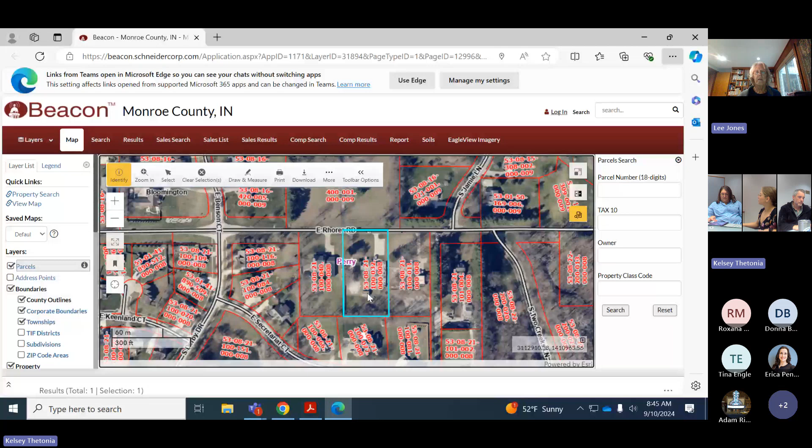As far as drainage goes, my main concern is that we don't have a great place to outlet it at the corner of the property here. We have single family residential all around it, and the nearest drainage easement is in this area here. The subdivision to the south does not have a drainage easement on the property for this to discharge to. So that was my main difficulty with this, but everything else is really straightforward.

Just one property over there seems to be some sort of easement as well. Is that a utility easement? Yeah. So that might be, you see what I'm looking at? Maybe an actual easement to get back to the lot behind. That's what I think. Okay. I didn't see an easement there. Yeah, there are not any drainage easements anywhere on any of those properties.

So historically, this was built as a home. It was used as a daycare facility for quite a while. In fact, it still has all the playgrounds and stuff from that. My understanding is it either sat vacant or was used as a home for just a few years, which triggered planning to say they had to re-get their conditional use and bring everything up to the current standards. My clients had anticipated, we're buying a daycare facility, we can go in a daycare facility. We're trying to bring everything up to snuff.

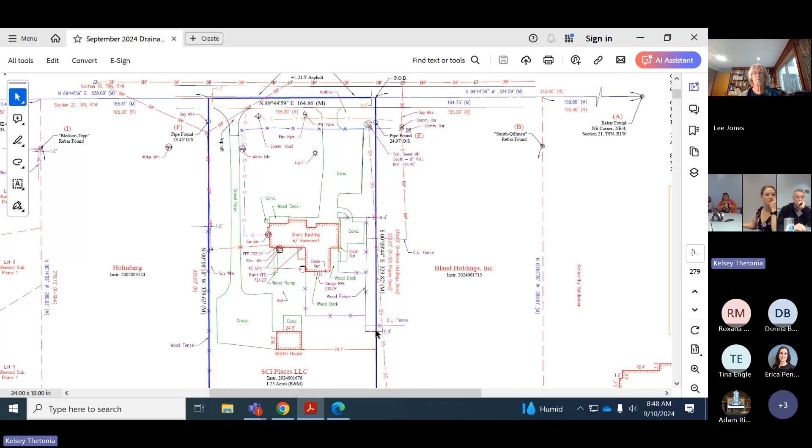The lot is 1.25 acres. And so getting detention in there while still allowing for their very elaborate playground setup was extremely difficult. Currently the parking lot drains to the east property line. Unfortunately, there is a sewer line along that never received an easement. So CBU is holding us up, in that they're requiring an easement before they'll release anything. And therefore, we can't take any of our drainage along that east property line. That's how it currently drains. And so we are having to route around the west side of the building. So that's the summary of what's going on there.

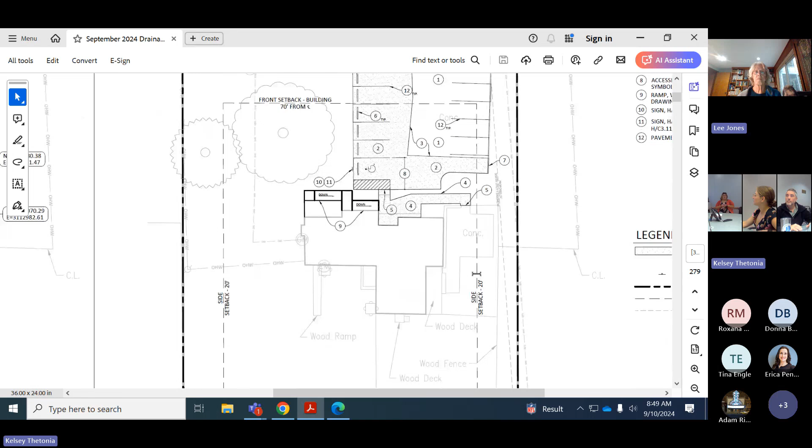Thank you, Kelsey. Because of how the county views gravel, and it is a very old gravel lot, we are actually reducing our pavement surface because the concrete we're putting in is less square footage than the gravel we're taking out. There's existing 2 separate parking lots and 2 separate drives. We're not allowed to keep the 2 drives, and so we're consolidating that up front.

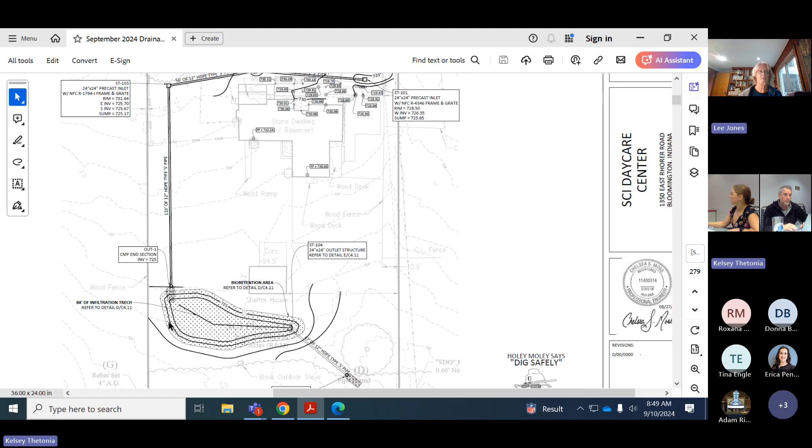Okay, so you're routing your drainage around the building, the west side, and then to a small pond on the south side of the property. Yeah, and that is only at its absolute deepest about 2 feet deep. That's for safety reasons, because we're gonna have lots of kids. I really can't take it any deeper.

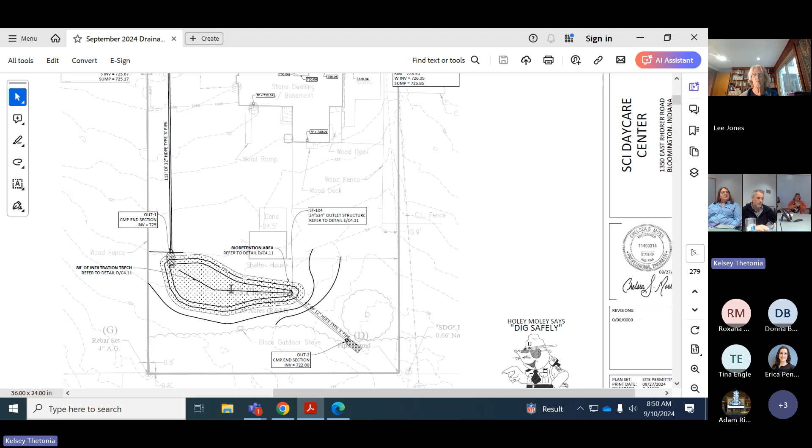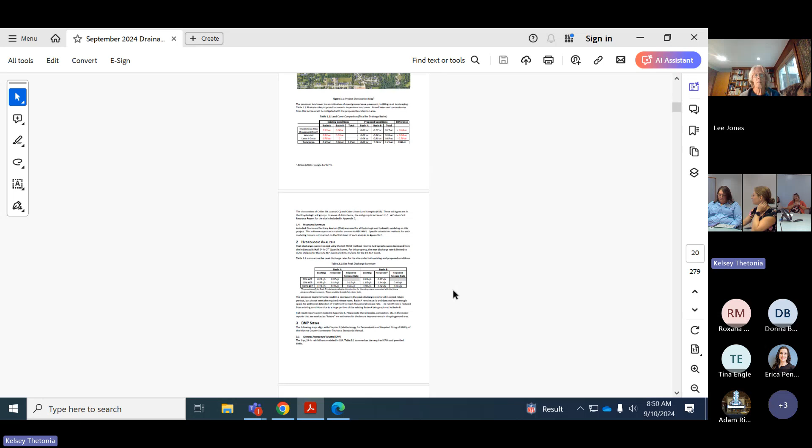And to take it deeper, we would have to build a berm, which is just gonna cause even more safety concerns. So fairly limited. I think a little further in the packet, as part of the drainage report, is the playground schematic, if you wanna get an idea of what they're looking at. They're in schematic phase drawing on that with another consultant. Oh, there, okay.

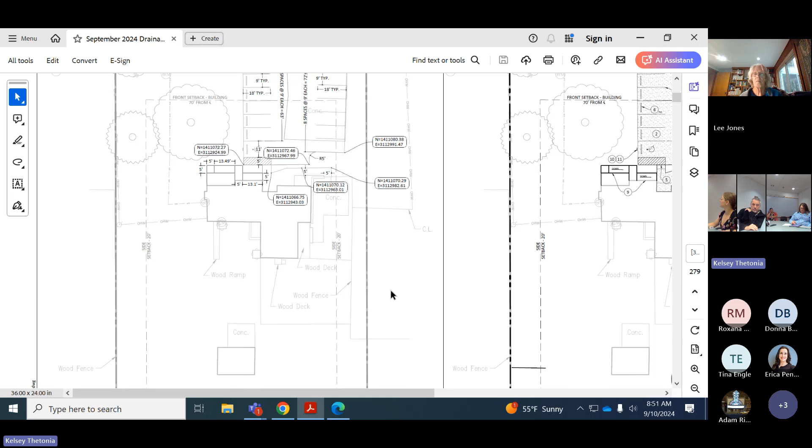So that's gonna tweak a little bit, but essentially our pond will be between those 2 paths on the back part. Those will get reworked to accommodate the drainage. Do board members have questions? So the pipe leading away from there, I'm assuming it's all draining the way it did before? Yes, there's a little bit that was draining towards the east. That'll be going towards the west, but we maintained the runoff peak discharges between pre and post.

We were not able to meet the critical watershed standards, but we are not releasing any higher rates than currently are. Is the board agreeable to waiving the critical watershed rates and allowing them to proceed with the design? Yeah, I mean, it seems like it's a very small drainage area effectively, so.

One of the things I noticed in going through the new drainage standard is it makes a lot of sense for larger sites. But when you have something this small, 1.25 acres, in order to put in enough storage to have fully met those, it would have taken out half the playground area. Just as something to consider moving forward with the new standard. We've come across that before as well. The small sites always cause issues.

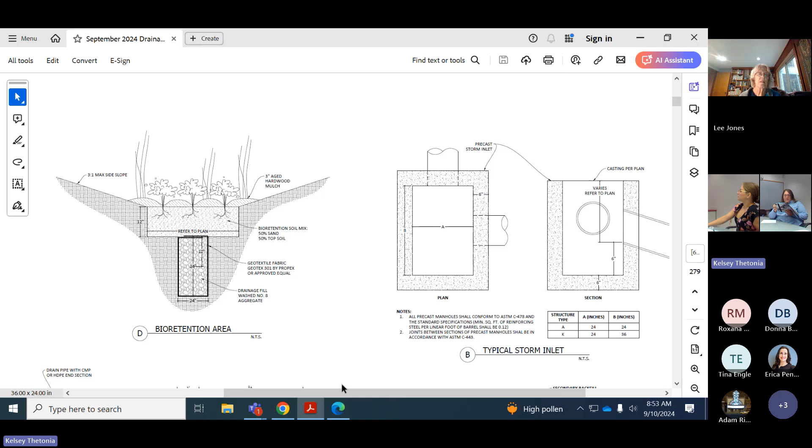So for this, I don't want to stop a daycare project by any means. I feel like they've done quite a bit for drainage already with the impervious surface they've added, so I think it'll be a good improvement. And is there any way, I saw there was a schematic on the drawing of the pond, to put some storage underneath there in the gravel fill or anything like that? Oh, there is some there already. Okay.

That's our treatment. I tried my best to expand that as much as possible with it still being functional, because of where this needed to occur and where we need an outlet. It does not have an under drain in it, but the soil survey is showing fairly percolating soils in that area, so I felt comfortable with not having an under drain. I expanded that as much as I felt we could without just having a huge gravel pit in there. It's not typically what we see, but yeah, I see the infiltration trench. I assumed that was underground, but I didn't look closely enough.

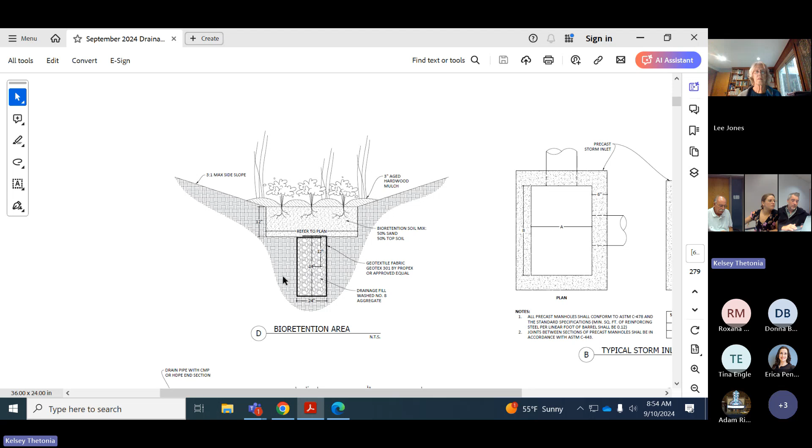Does it run around the perimeter? Through the center. I guess, are there any known cases of water pooling up or anything like that? There's no evidence on site of water pooling in that area. What about during rain events? Have you been there? Been there pretty shortly after, and nothing was overly soggy or seemed to be holding excess water.

And their playground, that would be one area that would get soggy. So the new playground will have an under drain system for the rubberized material they're putting in. And I think they're using more of a bark mulch material in their non-paved areas; they have about 3 or 4 different surfacing types. Anything that is impervious is getting an under drain, and with that design, we will have additional bioretention areas put in just for all of the new playgrounds. So there will be even more bioretention once they do that part.

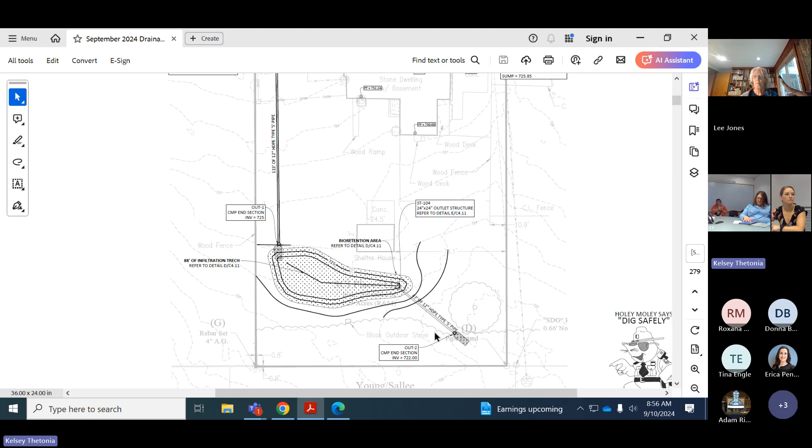This was focused on getting them in, because they've got to get in there and get some cash flow going before they can go back and do the playground, and that'll probably be phased. But I've already been in conversations, and I'll be working with them to size those bioretention areas as we work through the phases on the playgrounds. So that would come through as a site plan amendment? It'll either be a site plan amendment or a separate site plan, depending on when that phasing happens and how planning wants to handle it timeline wise. Regardless, any changes are gonna come across my desk, and I can bring it back to the drainage board if needed.

So Chelsea, they have a playground there now, right? Is it soggy, or do they have any issues when it rains? I've not seen any issues, so the soil is perking. Okay.

And then, you know how we're not supposed to have an orifice smaller than 4 inch? So I'm just curious how the drainage calculations would have panned out if we had to do it to the restricted flow rates and then have to bump up to a 4 inch, and then where we are. Right. That's more out of curiosity. It might be a wash.

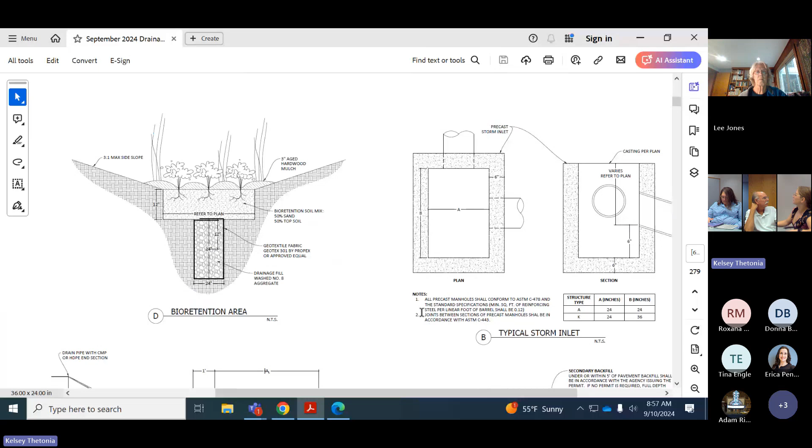Yeah, on that outlet pipe, Chelsea, do you have any type of orifice plate, or is it just a 12-inch opening? I apologize. Was that on a detail sheet? Maybe Chelsea had them. I don't think I had any work displayed on that. I will confirm. Yeah, I mean, it may be the same issue, having that smaller orifice. And I'd be concerned having that with no underdrain. Yeah.

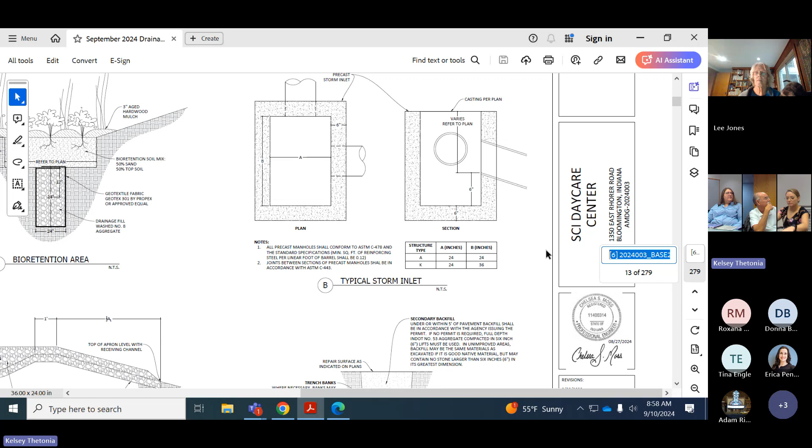Oh, and my concern is if there is outfall from the overdrain, how it's gonna affect neighboring properties. That's probably my only concern. The last thing I wanna do is cause a significant area in an adjacent property that then has standing water that never did before or something like that. I already envision the calls. Yes. Well, but did it flow that direction before? Look at Deckard's survey and just see. Yeah, I was wondering if you could put topography in there. Oh, it didn't have it, okay. We'll do that on his plot plans.

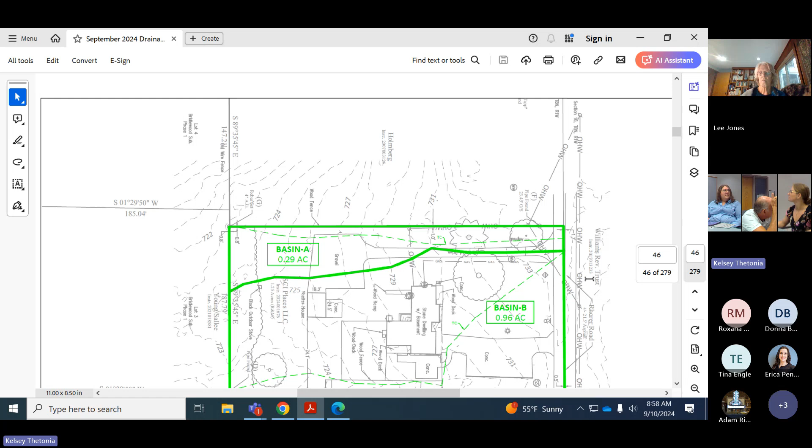You can see the change in the drainage basins, David, on your drainage report. Your grading shows? So it's 46. 46? Yeah, I think so. Okay. Is this the one you were thinking? Yes. So we reduced basin A, which went to the west, by a bit, just because we had to route around, because of the placement of that. So that went southwest? Yes. Okay, so the southeast basin then gets a little larger. But we were talking 0.2 acres.

And it flows southeast, right? Yes, so we have an additional 0.2 acres going southeast. Is it toward the house or toward that? It basically flows to the corners on both sides. Everything drains to the property corners, which in turn drains kind of across that southeast block. I'm just curious where it goes. Where are the contours? There, okay, got it, sorry. So we're going down, and it just goes through the rear yards.

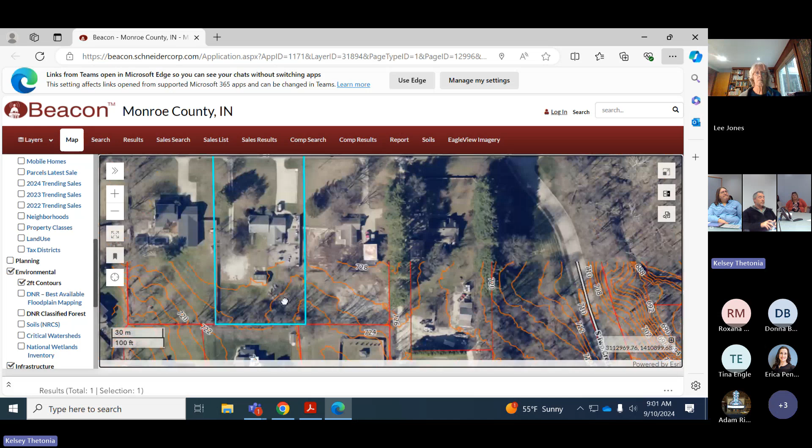Yeah, this is what I first saw when I was really concerned about this, because this property owner here is going to get the drainage from the pond. They have a fence, there's no easement. So I don't have a current solution to get this drainage across these properties. Has there been any thought or discussion with the adjoining neighbor to maybe get an easement to just drain it out, or were you just coming to see about the variance today? Yeah, because that's a driveway, that's not easy. We've not had any discussions on that. I could see why. So that has not been something we've discussed.

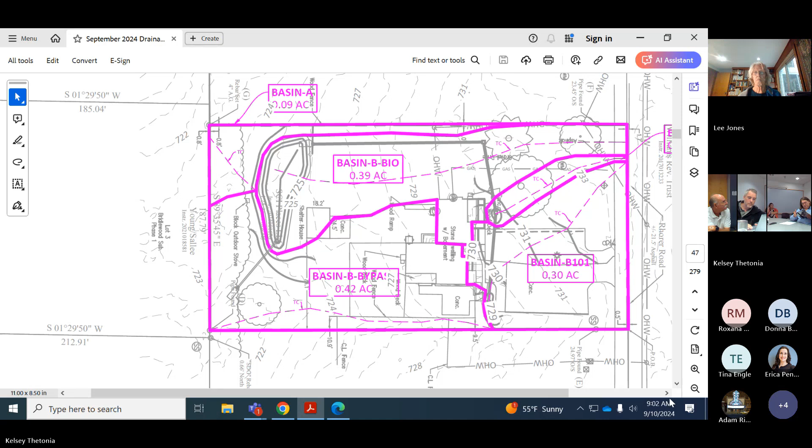Just to go back to the way these were put together: you have an inlet grate and an outlet pipe, so we're doing forced infiltration. There is no underdrain on those bioretention facilities, so the overflow, the top orifice, is regulating that outflow, to maximize that infiltration in an attempt to minimize our volume output. And in the drainage report you will see that I've included a pre-design for the schematic playground, speaking with Kelsey, so that we had an idea of where storage would fall and the requirements on those. That's all included in the drainage report at this point.

And right now, she has a couple of very small rain garden type areas shown on there. I'm anticipating that one that you're circling to actually be where most of this goes from the playground improvements, and that it will be bigger than what is shown. Yeah.

So, what was, we matched, you matched events or? I matched events, yes. Okay. We've matched events despite the fact that we've moved a greater area, slightly greater area to that basin A. So how much? And that does include matched events with the change in runoff coefficients in accordance with the new, and with that increased area, so.

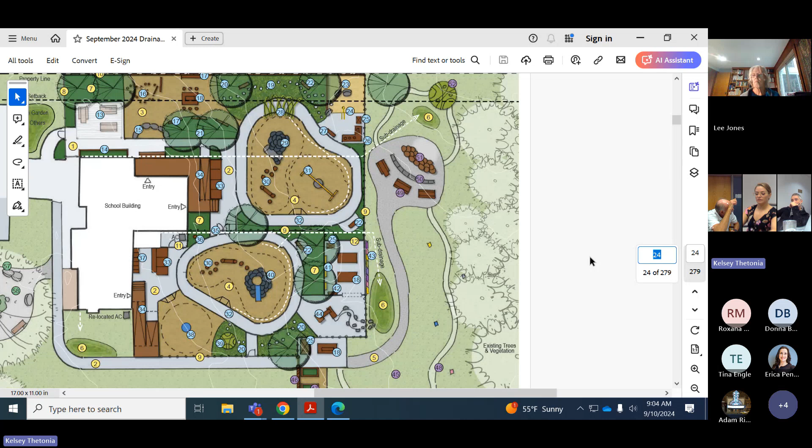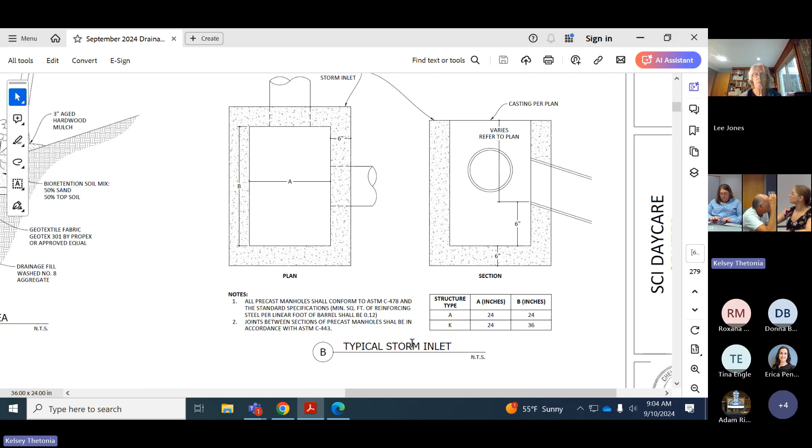You said you had forced infiltration, so look at that. Can we look at the outlet control structure? I don't know how to tell. Yeah, there was one that had that. To the right, I think. Go up, I think it's in the outlet. To the right. Is that your outlet control structure? Yes, or no, that's typical inlet. Okay. There it is. Yeah, I think I had that one in, it should not be on there. I apologize for that. There's not in orifice.

Okay, and, it's just gonna have a grate. Sorry, it's been a few. It's all right. Been a minute since I looked at this. So I'm confirming in my report that that is not there. Cause I mean, we had one other project where we didn't try it out not having an orifice for that.

But I'm sorry, that's the one 6-inch orifice, so there's forced infiltration in the infiltration trench and in the soil, because there's not an underdrain, and then we have one 6-inch orifice. And then we have orifice control in the top overflow for the 100-year. And with all of that included, we match storms in that basin as it sits. The 24-inch was the deepest I wanted to go for safety, as well as with the bioretention aspect. It's really pushing it on plants, but you can get that to drain. Mhm. Survive.

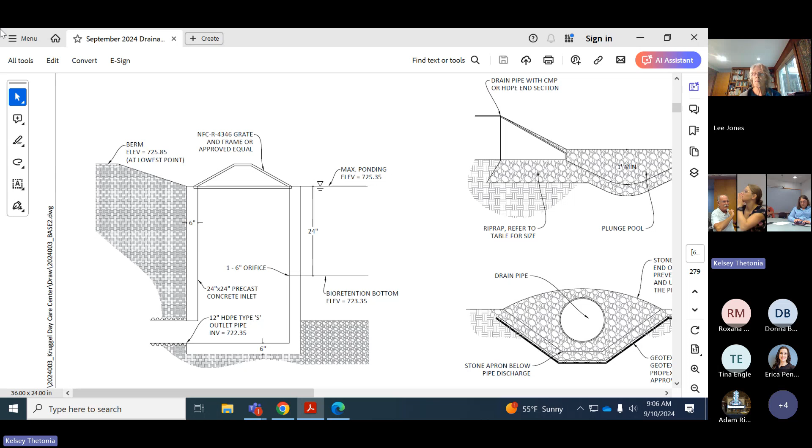Any suggestions? Did you have a drawing that showed the basin compared to the playground, just to see if the basin could maybe be? Sounded like the basin couldn't be made any bigger. I don't have it overlaid, because I don't have CAD, but I can show you. I'm just gonna walk up here and show you where that goes. So there is a walkway that goes to some raised garden beds that they're looking to do. That walkway is gonna cross right about here. The playground will go all the way to the end of this existing shelter house, so it will come straight across about where that 47.1 shows up. And then we will run their path along here.

This tree is staying and they want to have some gathering area around the tree for group time. Where's the group time? Around this tree down here, not necessarily amphitheater, but I'm envisioning some stump type stools for small group time with class. Could the basin be enlarged toward the southwest then? We could enlarge it a little bit towards the southwest. I was pulling back from that because they're also planning on having a trail around that way. And the further I pull that, the steeper we're going to be dealing with more of a path. So that was my thought process there.

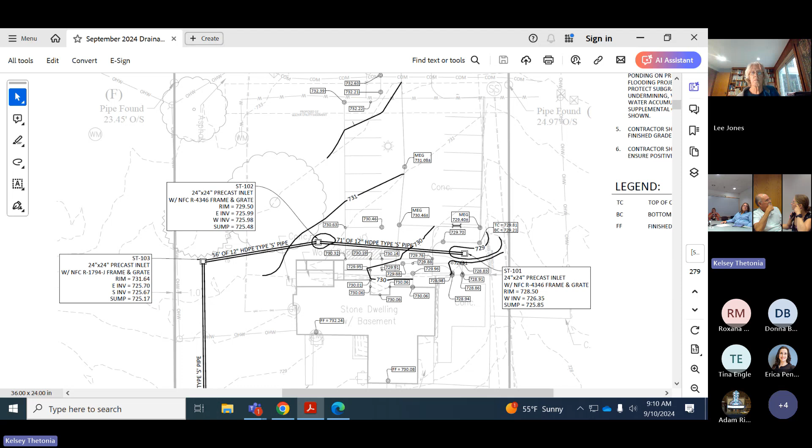So, I'll be honest, when I was originally talking to Kelsey about this, we were going to do some small rain gardens for the treatment up around the parking itself. And then we ran into the easement issue, and yeah, I still would have preferred to do some small treatment up there. Because like I said, if you're taking the gravel as an impervious surface parking lot, we're not really changing the impervious area in the space. And as such, if we could treat that with a small rain garden for quality up front, I think that would be less impactful to the neighbors.

This, in my opinion, is gonna be more scary to the neighbors than treating up front, because we're having to release in the back and we're having to release further down. If we could treat with a few small rain gardens purely from a quality standpoint, because essentially right now, what we are treating in matching storms is the change in the runoff coefficient. Because we're not increasing the impervious overall. And so we're holding that change to match events, and then we're treating quality.

And from an overall picture standpoint on this, yes, there's the standpoint that we've had to add a whole bunch of infrastructure and there's some cost increase, but I also feel like if I lived next to this, it looks a whole lot more imposing and looks like it could cause a drainage issue, as opposed to rain gardens that would release about where that structure 103 is, and release down on the property and run across the whole property, as opposed to having a concentrated release at the back end.

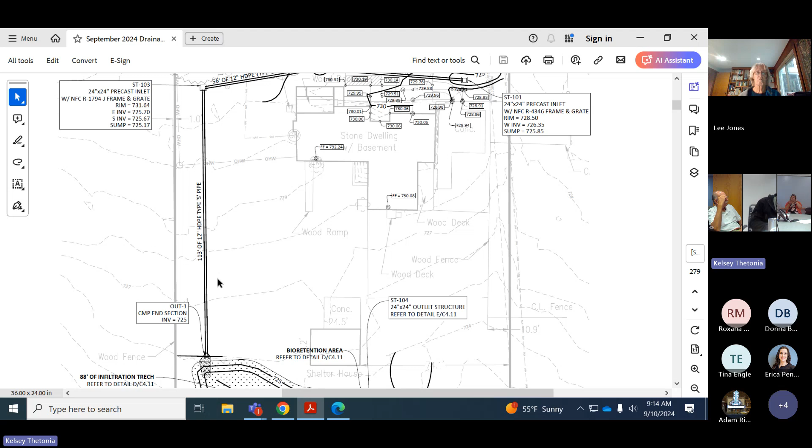So, what about increasing storage by, instead of piping, turning that into kind of a bioswale or something like that? Wouldn't that assist with the treatment? We could swale some of that, yes. It would increase the time of concentration still. We would still have a significant amount of detention. Because I had to get it all the way back there, I was trying to weigh against what they're looking to do and having those playscapes, and weigh that against where I had to put infrastructure. So I'm running it in such a way that they can put raised gardens on both sides and things like that. But that is a possibility.

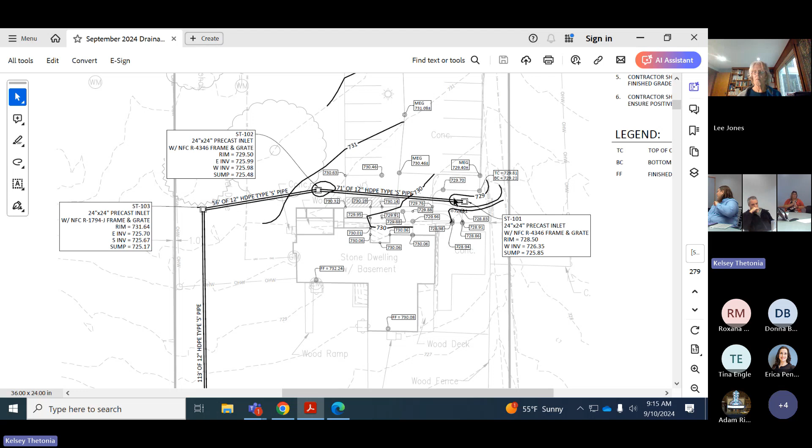As I say, they could just turn the raised gardens. Since the raised gardens are there, they just turn it 90 degrees, seems like it would be. Yeah, I'll be honest, the location of those raised gardens is outside of my expertise too. I would have to talk to Carrie, because I know there are some aspects that her and I have had to go back and forth on, because they have specific educational concerns. Yeah, I was just trying to get some more availability for moving the water and treating along the way.

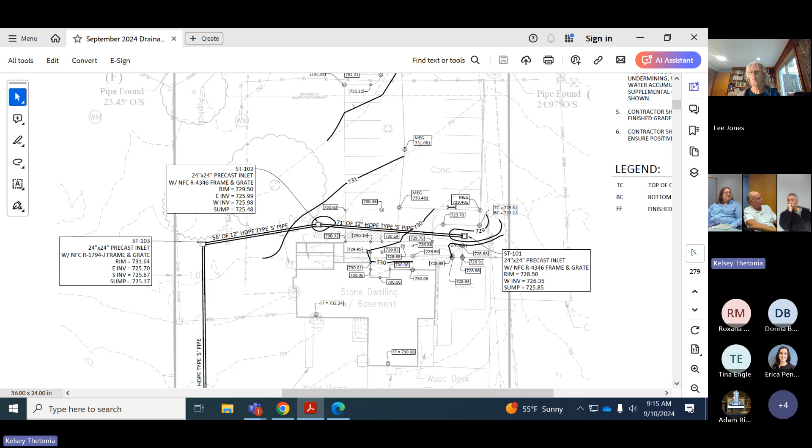So, I don't wanna make this difficult. Right. So a motion to approve the drainage plan meeting the previous standards, but with an evaluation of bioswale and/or increasing the size of the detention pond, in an effort to keep the flow to the southeast at pre-existing conditions.

And with the justification that this is a small site. Yeah. This does go to the planning commission, yeah. Or is this through the thing? No, this is all administrative, just the site plan review.

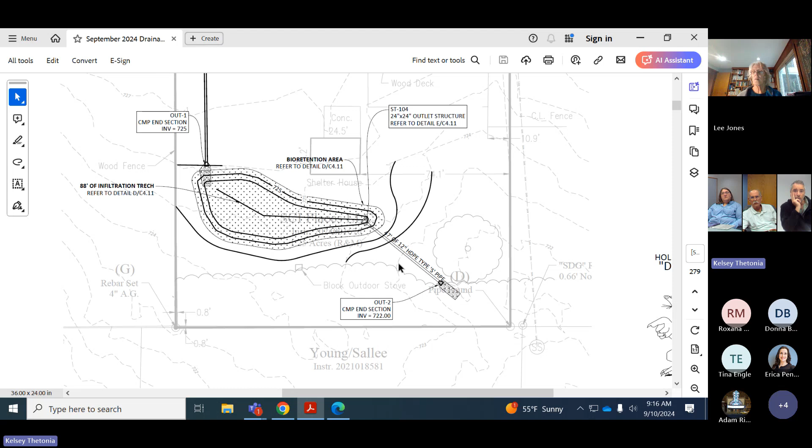I guess before there was a second, planning was on here, and since this is a petition, I was wondering if we'd let them see if there's any particular question they had for us prior to the planning permit, if they're on here. Drew, I saw, was on earlier. Hi, Drew, Sean, just in case they had any questions. And they might be waiting. Hi, Daniel Brown here. I'm the planner that's going to be handling this petition, and no questions so far. Okay, cool, thank you. Thanks for letting me make that pause.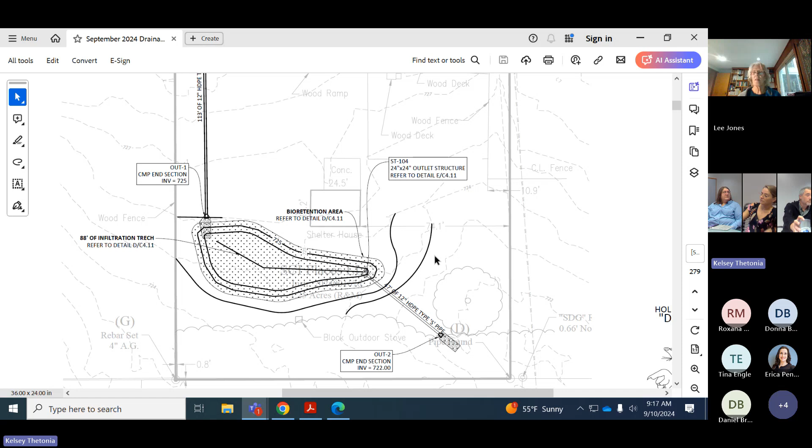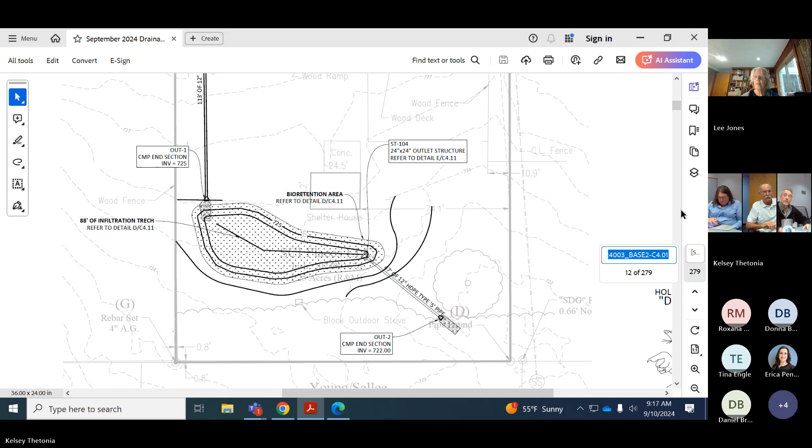Was that motion clear enough? Yeah, I'll second. Okay. We'll go a roll call again. Lee, yea or nay? Yes. Ginger? Yes. Bill? Yes. And audio, yes. Thank you. Okay.

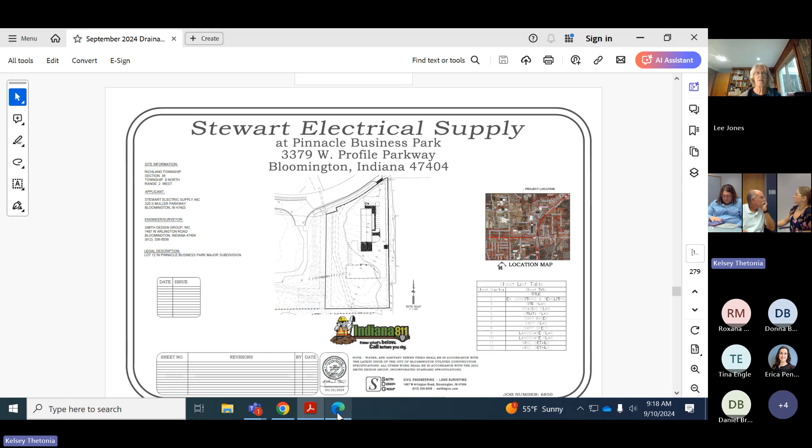Alright, next you have a development on one of the lots in the Pinnacle Business Park. So this is the business park where Profile Parkway goes through. This area drains to the regional pond on Jonathan Drive. And this has been the part where we have very interesting things like contaminated soils. We've seen some industrial uses come in here. We have McAllister's property. We'll have a U-Haul development right here. And then this one is for an electrical supply company. So they'll have a building, parking area, and that's all. So all of these projects require drainage board approval, so that's why you're seeing this, even though it is draining to the regional pond.

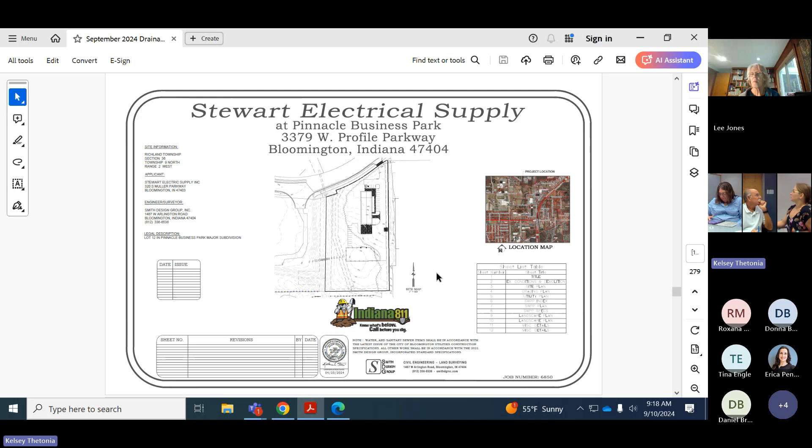Katie and Jonathan Smith Design here. Is there anything else you'd like to explain about this project? No, there's not a whole lot. We are here because of the conditional approval that was set for Pinnacle Business Park subdivision. This is, like Kelsey mentioned, Stewart Electric. They have been in Bloomington since the 80s. I have Sean Diltz here directly with Stewart Electric, so if there are any operational questions you guys might have. Fairly simple site plan. They've got their building that will house showroom, offices, and then the majority of it is going to be storage of the supplies that they provide.

Customers can park up towards the front, which would be the north, which is to the left side of this. Employees and contractors can come towards the back side. They have loading docks in the back, so contractors can back up, load their vehicles, go out that way. Larger trucks can unload. Most of the operations from that perspective will be on that south side. They also plan to have an outdoor storage area for materials that will be fenced in that location. As you guys are well aware, this is in Pinnacle Business Park that has the affected soils. There is a dashed line cutting diagonally through the parking lot, and everything to the south and west of that line is the affected soils.

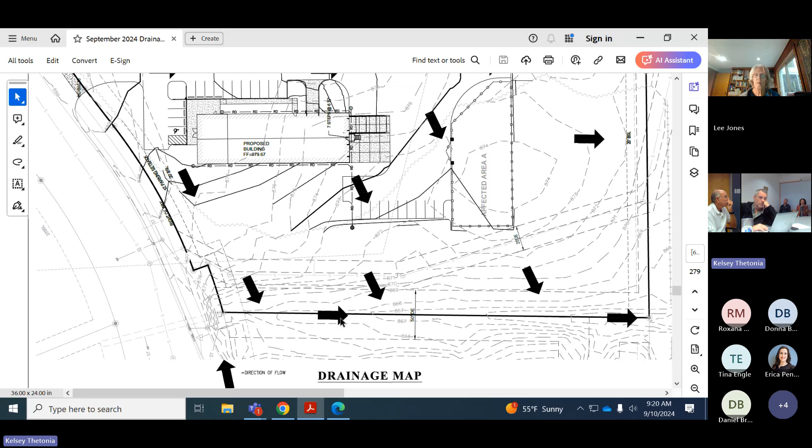So having done McAllister, we're trying to keep in mind different things that we need to look at with those affected soils and trying not to be invasive as much as possible. So the design reflects that. This is sheet flowing. We do not have any storm structures in here. So this will sheet flow across the parking lot, into the lawn area, into the swale that is designed to convey runoff from these sites. We're not even close to exceeding what the impervious surface allowed for this site is. I want to say 70-ish% is what we're allowed, and we're down towards the 50% range. So that's what I have on this, but happy to answer any questions you guys may have.

And so, is this the affected soils line here? We have a hatching on some of this, but it gets confused. Yes, that one that Kelsey has. This one? Yes, exactly. Nope, sorry, it's this one right here, the dash. Yes, on some of the other sheets it is hatched, but it gets messy to keep that hatch on. Right. The line's still there, but not all the hatching. Yeah.

So, there will be some excavation in the affected area. Do you have an environmental company available for overseeing any of that work? I don't know if they have been hired. It's been suggested that Terracon be involved with that, since they are obviously very, very familiar with this site. We had hired them, they've done the first phase and they are on board, so.

And I will say too, speaking with the developer on this site, the EPA is close, if not there, to being done with this site. It's a very, I'm probably not using the right words, clean site, and the remediation and everything has gone really well. I think they're pretty much done with this site, as long as we maintain the precautions around the affected soils. Yeah, the restrictions and things are not going away. Yep. Okay.

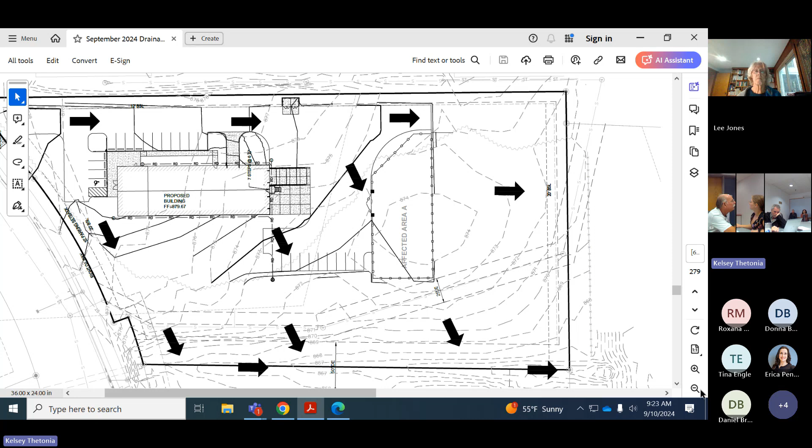So it looks like we're filling anyways, right? It's filling over the affected soils. Yes. You might have to strip some of the topsoil away, there's a 1 foot cap that's supposed to go all over that. But it will then be filled. Yeah, we were just trying not to penetrate into that at all if possible. We were kind of doing the same with our erosion control measures, not putting silt fence, but the coir logs and things like that.

But you'll still have a fence through. Yes, in the affected areas there will be the fence posts and things like that from a long-term perspective. So we've had that on some other sites. Do they have any issues with that? Because those typically go 3 foot. I think if there's an environmental company who can oversee that work, if they are excavating, when they auger, any soil that's removed for the fence post will need to be disposed of properly. Okay.

I appreciate not using up all the impervious allowable areas, so that's great. It helps with our detention. We normally don't get that, ensuring that we have enough capacity, so I appreciate that. Usually it's, how big can I make my building? Right. And this basin wasn't designed for the new standards. The regional pond. That's why I appreciate the reduction. It's probably gonna need it. Well, it's what the standard was at the time.

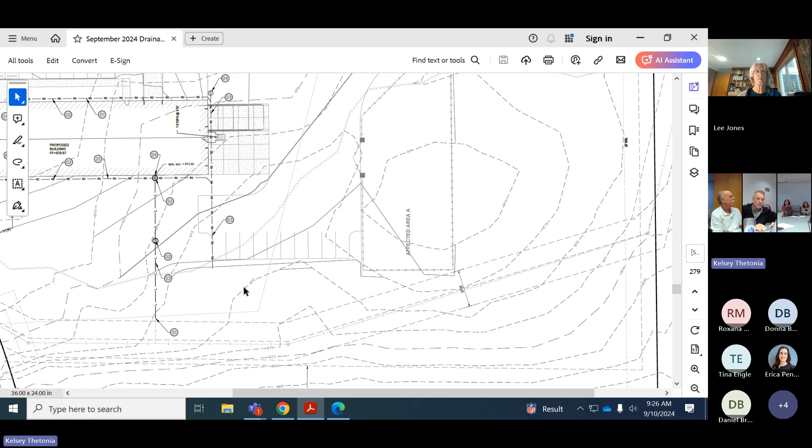And I do have proposed on the southern lot there a river mulch bed for the landscape area, because all that runoff from the parking lot will go that direction, even though it's about 2%, 3% slope in that parking lot. Not that the velocity is gonna be great, but at least let's put the gravel there, it'll catch it first before it goes on to the lawn area. So you put a river gravel edge on it. Yeah, it's shown on the landscape plan, maybe shown on the SWPPP as well. That makes sense. It's delineated. The next sheet down, there it is. Okay, that is helpful.

I understand the intention of having sheet flow, not having to encapsulate things, but we've had issues with erosion anytime you have a parking area that sheet flows into grass. It's very difficult. It tends to concentrate. It'll find a way. The paving companies are great, I've seen some really nice paving work, but there's always gonna be a low area that it'll find. That's good. We'll review the erosion control plan, and that'll be it for this.

So, any other questions? Make a motion for approval. I'll second. Go ahead, Tom. Okay, I'll second. Lee, your vote, yea or nay? Yes. Ginger? Yes. Bill? Yes. And Audio, yes. Okay, all right, well, thank you.

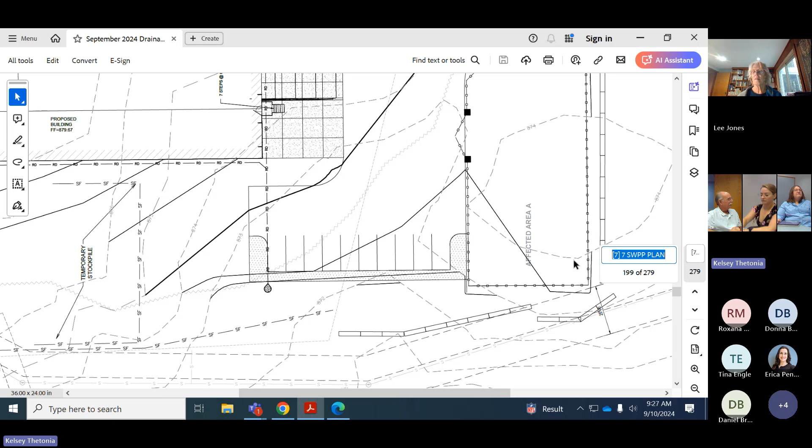We have Smith on here for another project. This one is going to be a bit more. Let's see. Oh, thank you. Okay, so we have a rather large church, new parking area proposed in the Sinking Creek watershed.

Yeah, the last one was kind of easy. This one's gonna be a bit more complicated and involved. So let's see, we have critical watershed, yeah, great. There are critical watersheds from the Sinking Creek. And then I can pull floodplain, you can better see the area screening too. Okay, so this is the Sinking Creek floodplain with the west branch of Sinking Creek right here. This project is being proposed just at the west branch of Sinking Creek.

So is it the property line that runs in the middle, or is it both properties? So they're separate parcels. There's a section line, that one's a section line right there. The property line goes right through the middle of the creek. Okay. Right, yeah. That's a section line, huh? On the new demo. Fourth section. No, that's fine. I'm just wondering if it's actually a representation of the parcel following a section line, or if it's our section

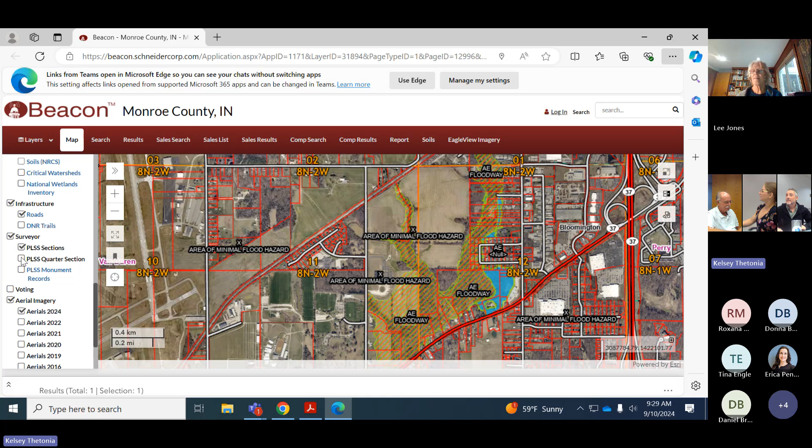PLSS data, and if so, we need to make it a different color or a different something. I've already got 5 notes just today. I should write them down before I start forgetting. This morning already? Well, here you go, Sharon. I hadn't had those layers turned on. They're orange. Well, there might be some that just auto generate, so we just need to make sure that they're pointing and pulling the right data. Okay, so I'll double check. Thank you.

Sorry. So anytime we see a larger development in this watershed, we obviously get concerned. We have an old Christopher Burke study that said we need to excavate 390 acre feet of material that's accumulated at this terminal stream sink in this whole area. Of course, it's on church property. And I don't know where to start with that, but we have issues with volumes in this watershed.

So is it all part of the same church? That's what I was kind of wondering. It's a different church. So Trinity Church is on the south side, and then this is West Side Church. They were affiliated with Sherwood Oaks, but they are now, I believe, separating more or less from Sherwood Oaks, but it is definitely a different church than the one to the south. Okay. But this sinkhole that we're supposed to remove material from is from the other church? Most of the area is owned by Trinity Church. Okay.

Yeah. And remind me, so Christopher Burke said material needs to be removed? To alleviate some of the flooding issues, they estimated 390 acre feet of material that has accumulated could be excavated from the terminal sinkhole. When you say flooding issues, would you expand? It sounds like you know a little bit about what's been occurring in this area.

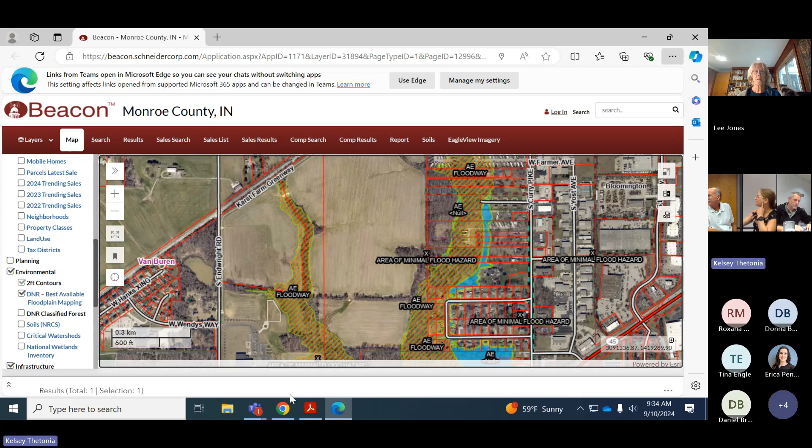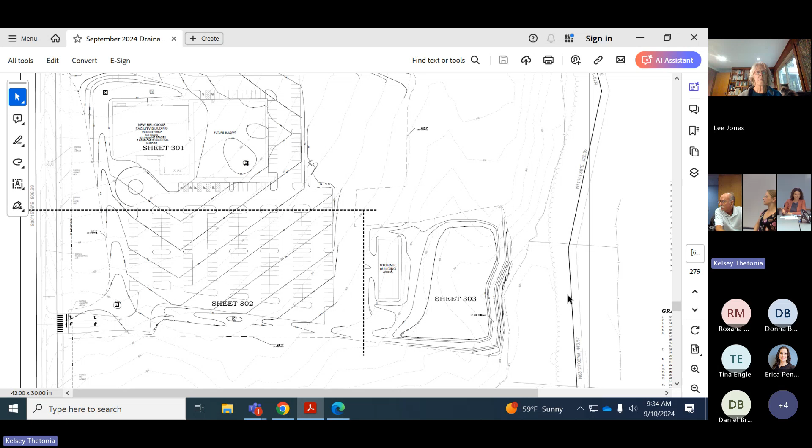Yeah, and kind of going back on the previous petition with the smaller sites, and I would agree, we don't get those too often in the county, but it is difficult to meet in some circumstances the new release rates in addition to the critical watershed rates that are also being met. This site being 15, 16 acres, I think this is an ideal site for when these release rates should be implemented, and it seems to work very, very well.

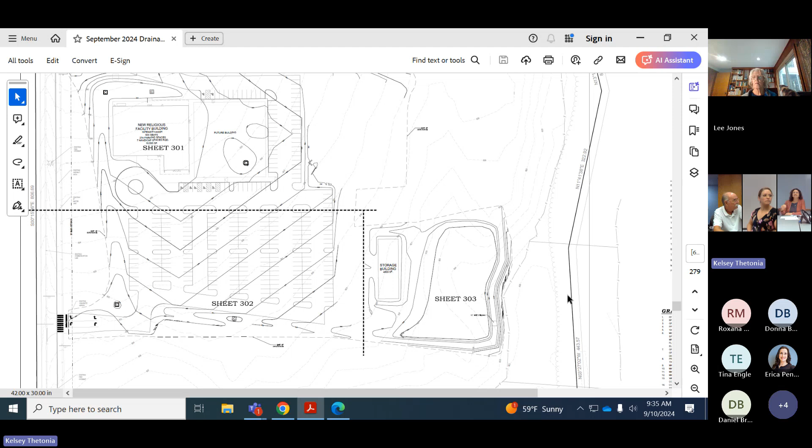So, yeah, I don't even remember which iteration this plan is. We've been working with this church for 3 years, so we have had a lot of different designs and parking lots and buildings and everything. And even though it's a large farm field right now, and it seems like there's a lot of fall, when you really get into dissecting the drainage, there's not a lot of fall on this site. So it's difficult to get water to go towards the detention pond.

But anyway, this detention pond is sized not only for what we see here, but also future expansion, not just where it says future building to the east of the building, but overall, if the church at some point in time wants to expand in other ways. I know there's been different conversations. They've been all over the place on what could potentially go there. So we've incorporated that into the design of this detention pond.

I believe they can go up to another 50% impervious surface on the site and still be accommodated within this detention pond. As Kelsey mentioned, we also have a floodplain right adjacent to it. So we're trying to stay out of that, and that is our intent. We do not intend to touch that floodplain whatsoever. And I would say we are definitely pushing the limits in getting this drained and getting the pond to drain. It is a fairly shallow pond. I think it's only 2 feet, maybe 3 feet at most, but it is really, really wide.

There will be a series of underdrains at the bottom of this, in addition to all the bioretention plantings and an outlet control structure. This does not have an orifice, but the top of that outlet control structure is, I think, not even a foot above the bottom of the pond. So all the low flows will be going through the underdrains. Everything else will then be going through the standpipe in the detention pond.

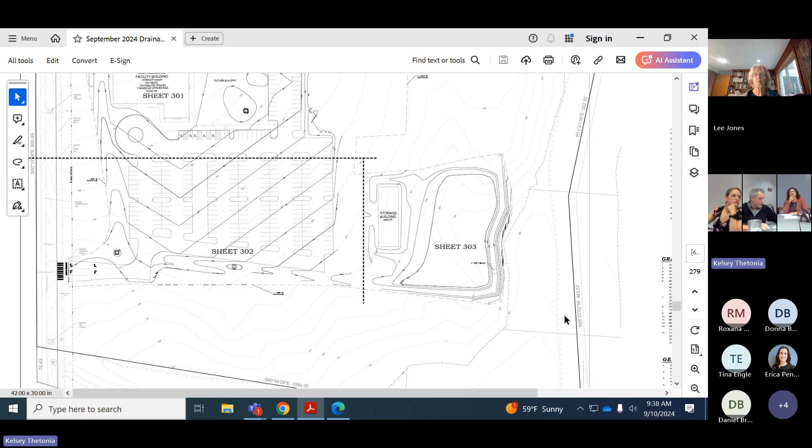And it's a huge pond, huge pond. Do you know the base flood elevation? I'm sorry, do you know the base flood elevation? 725, I'm recalling that from memory, or 825. I don't remember what elevation we are here. We're 824, 822. Yeah, we're at 820.

The 822, yeah, that's count 822 right here, from there. 822, 823. So by the 823, then at that location. Okay, just wondering. If you don't have that right now, that's fine. Sure, Carrie will look at that in the plan review. I think the outlet pipe is coming out right about at that elevation, again, if my memory serves me correctly.

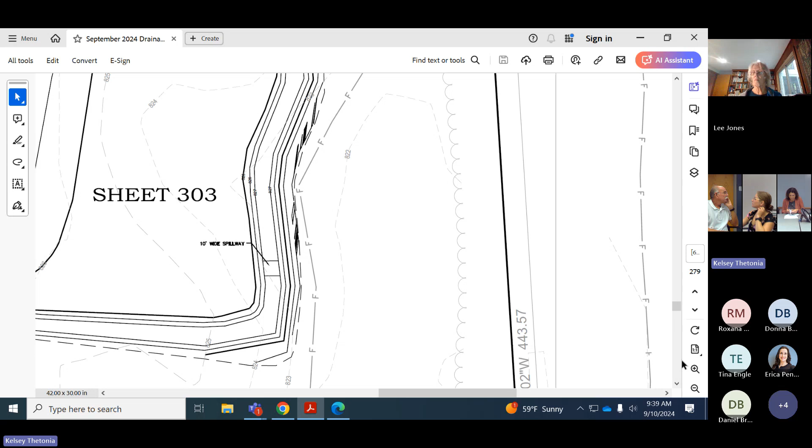You're saying this pond is accounting for the future building? Future building and then just in general, future expansion up to 50% of what is shown right now on this plan. Like parking. Yeah, they might want additional parking. I know they've talked about putting maybe some outbuildings, maybe a school in there. We're talking way out in the future. There's just been so many ideas floating around on what they could possibly do here.

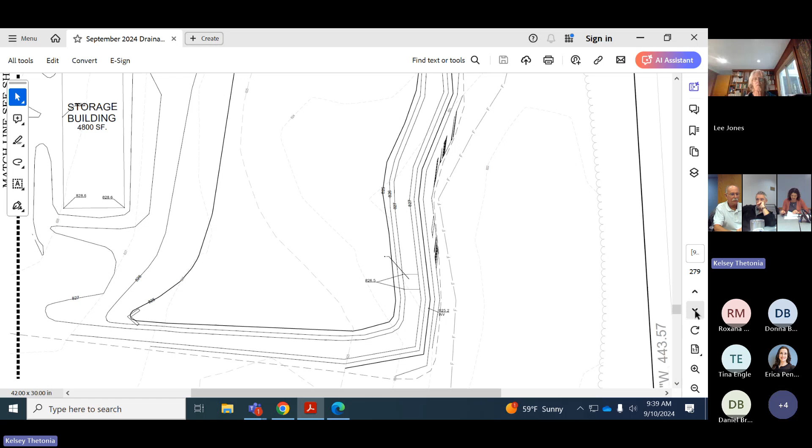Yeah, I think the base flood is an 823, Kelsey, because we're coming up, I think, 6 inches above that on an outlet pipe. Yeah. I appreciate that you're meeting those release rates and even less than some, and also accounting for future development. Good stuff. And I say it'll greatly reduce it with just the church.

So that's with future development. Who knows how far out that future development is. So in theory, this will be slowing that down even more until that point in time. So you get your acre feet out of there. There you go. And that's the point of the release rates. It's not just to mitigate the current development, it's to mitigate the issues in the watershed in general. Right. It's hard to do.

Question about the no orifice in the structure. You did a project that didn't have an orifice. Have you heard back on how that's working? Which project was it? The library? Yeah, I think everything's working fine, it's not holding water. We had some problems with our cleanouts or observation things that we had to go back and check.

And this structure is only 0.75 feet above the bottom, so that's essentially where I would have an orifice. And we put in a series of under drains in here, so the idea is that it will not hold standing water. Because it is only a 2-foot deep pond, it'd be difficult to have a standpipe and an orifice within that same structure. So the under drain works kind of like the drain, as long as the medium.

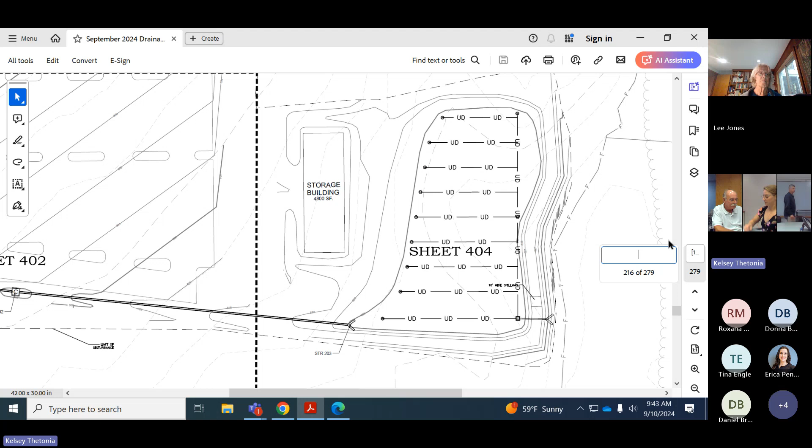Sorry for the long packet. I did not spend time on a detailed packet for this meeting, so that's why it's 279 pages long. Normally I try to read through things and give you only what you need. I did a one-page memo, not my typical more detailed summary. Well, that's good. I think this will be the way to do it moving forward.

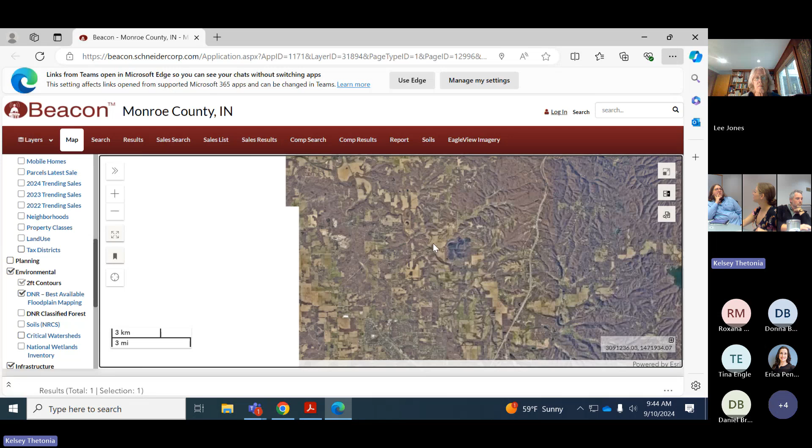Okay, so this one I kind of threw on the agenda at the last minute, very different project. So we had in 2021 a minor subdivision off Thomas Road, so we have Vernal Pike, Howard Road. I'll pull up a better segment for you. Okay.

So this is the Route Quarry. This is Richland Creek, approximate floodway. We're not in a critical drainage area. This is Thomas Road, Vernal Pike. So this is a 3-lot minor subdivision that was done in 2021. They applied for a building permit before the subdivision and built a home, then subdivided it into 2 more lots to build 2 more homes. And so we have sinkholes at the top of the hill here and drainage easements going down these swales. This was an existing hayfield recently. So we have drainage easements on either side going to this floodway here.

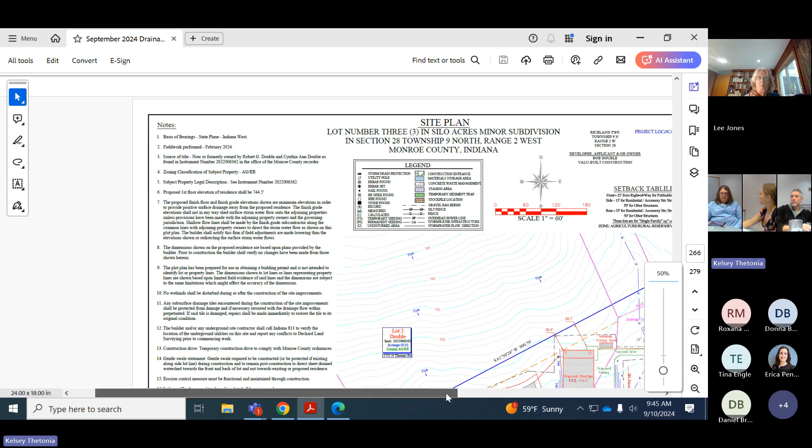The contours, where are they? There they are, okay. So quite a bit of elevation change, but we do have easements going down to the floodway here and here. The home is going to have one crossing over this drainage easement here. Pull up the plans and you'll see a 24-inch driveway culvert, so they can get onto the lot here, which is fairly standard. I usually just administratively do those for driveway access, common.

The difference with this project is that I was expecting a residential home to go in here, but then they decided to do a multi-use structure, so the pole barn to house construction equipment and materials with an apartment above it. I'll let planning explain what happened here, but it went for a commercial site plan because of this change. So I was going to ask you to waive any detention requirements, since if I get a site plan, I would automatically say it requires detention. I was anticipating a residential home for the minor subdivision, which I wasn't going to require detention for, but now it's a commercial site plan.

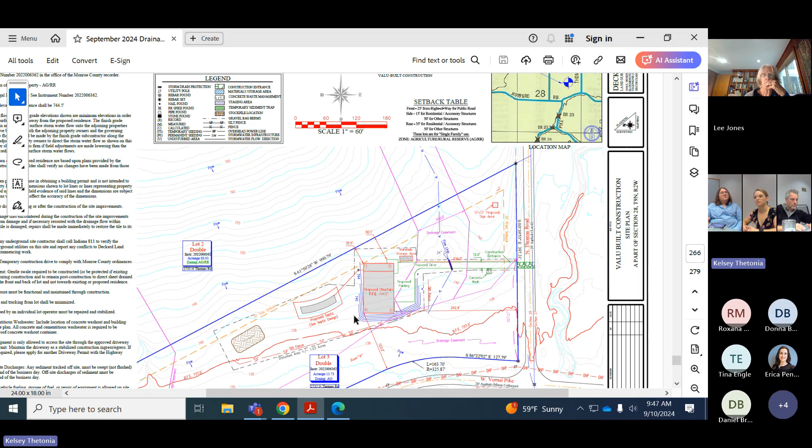I asked about what materials would be stored in there. They said things like drywall, trim and maybe some appliances, but no equipment maintenance. We have no storage of hazardous materials in here. And so I don't think I need any water quality measures. So I wanted to bring this to you to see if we would need any detention. I wasn't about to, because I was expecting a home to go in there with essentially the same impervious surface. And it's discharging directly into this floodplain, so we are limited on space.

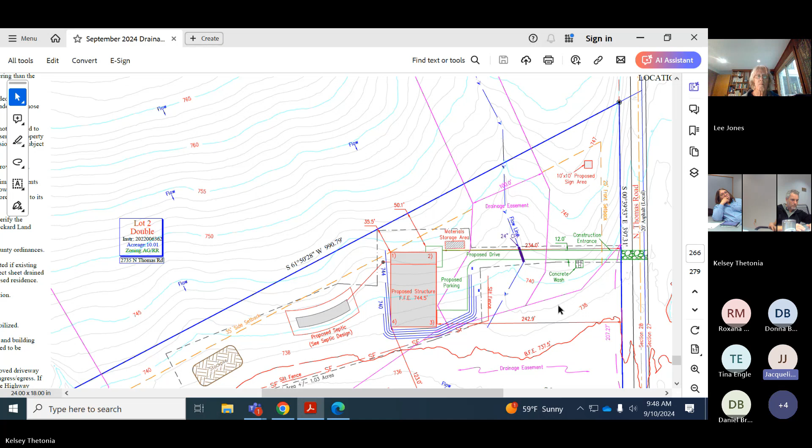Kelsey, yeah. I can speak to the planning process here. So we passed an ordinance allowing for what's called a rural general contractor after we received a lot of requests or demand for this type of use. It requires presence of a principal dwelling on the site. And if they have any outdoor storage of anything related to their general contractor use, it has to be completely screened. In this case, they're going to be putting all of their materials inside. So this is a facility, I think, for Valu Built Construction. And they're going to have the operator live on site. So that's how this was able to get passed in an agricultural zone. Okay, thank you for that.

So this is not considered a home-based business, and that's why it went with a site plan. Yes, one step above home-based business because it's a little bit more intense, because they're leaving the site to do their business and then bringing materials back. Okay. For proposed parking, is there going to be a parking lot? Like, will we have cars parked? There's not going to be any retail or public coming to the site. So proposed parking is really just for their own private vehicles. I don't know that they actually have to have a certain number of parking spaces. Daniel's the planner taking this on, who can clarify.

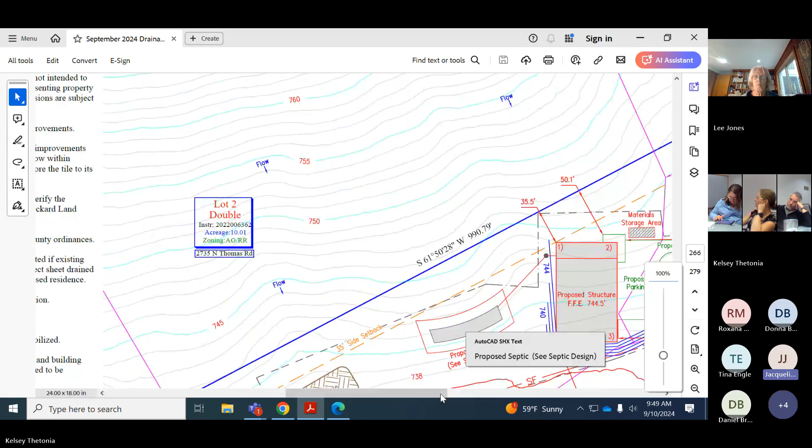Yes, I checked chapter 806 and there doesn't seem to be any minimum number of spaces for a general contractor rural. I did request in my comments back to them that they provide a parking plan with all relevant standards to chapter 806, but there's no minimum parking requirement. Okay. And parking lots are something we look at for water quality and detention. But again, this is the footprint I was anticipating for that residence.

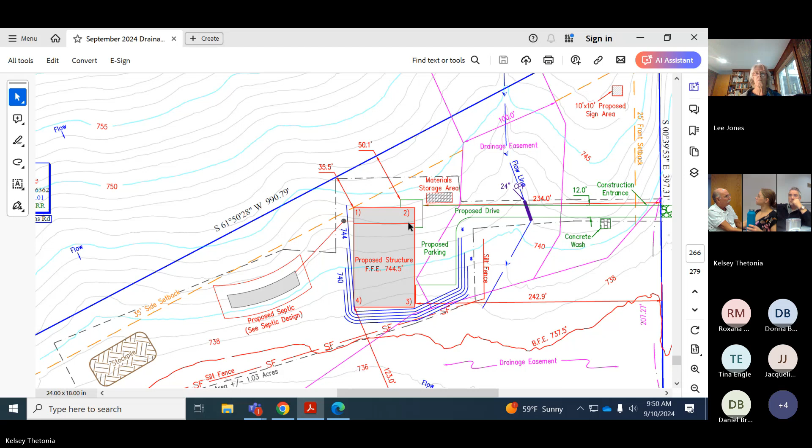Daniel, do you know the dimensions of the building? The proposed structure is going to be largely storage for a general contracting business, but that little section at the top where it says 1 and 2 is going to be a 2-bedroom apartment for the operator to live in. So do you know the outside dimensions of the building? Those should be at the bottom of that page. There's a little diagram of the building. Right there, proposed house detail, not to scale. 60 by 100. 6,000 square feet, plus a porch.

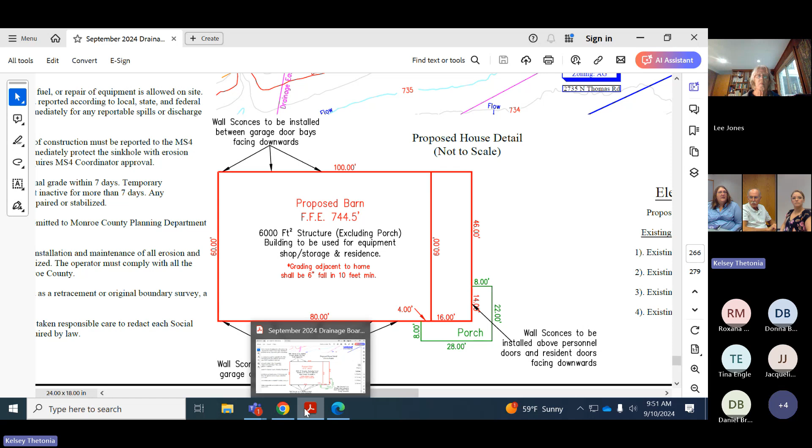So I'm just thinking future-wise, say these people sell it and move out and somebody else comes in. Are there any restrictions on who could move into this sort of structure? I'm only asking because there may not be water quality concerns for this tenant, but a future tenant may be doing something different. Good point.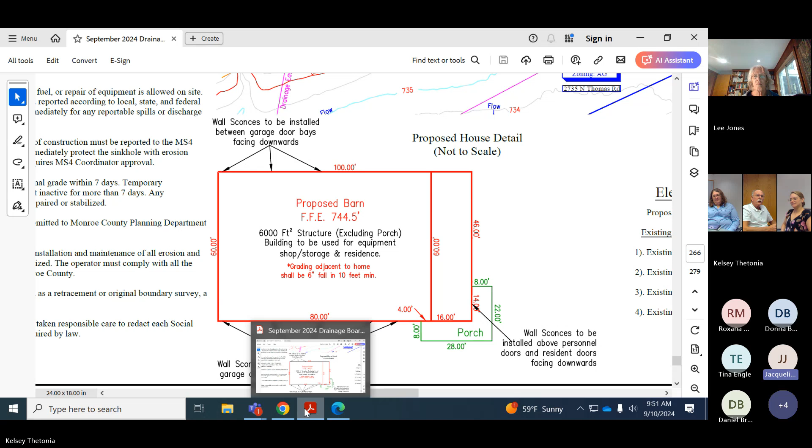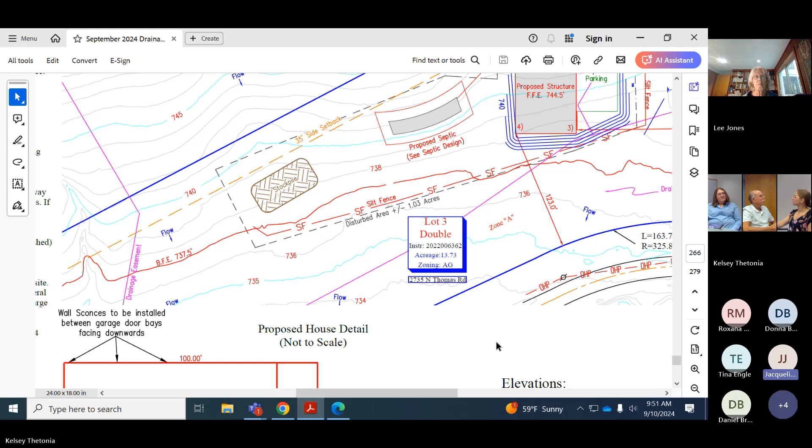So the use requires an affidavit that the operator, owner of the parcel, live on site. If they do change hands and they change business models, they'd still have to meet a general contractor use. If they changed their use or did something different, they would probably have to come back for further planning approvals. Right now, they're only doing inside storage, and I stress that because if we received a complaint for outdoor storage of materials, then it would be a different review that we'd be going through. So this is specific to the use that they're doing, indoor storage.

So if another contractor buys this and stores different materials inside, that wouldn't trigger a site plan review again. They could sell it and store different things in there without us really being involved. That is correct. So we're worried about, likely they're gonna have paint and mineral spirits and stuff, I would think, guys that do drywall sometimes paint. You've got a lawnmower and gasoline, so what kind of materials are we worried about storing?

Yeah, so it could never become like a repair shop? I was just thinking auto repair, it's got oil change. What happens if it switches hands and becomes an auto repair shop or something like that? Is that still general contractor or no? That doesn't sound like general contractor, that'd be a different use, right? Yes, that would be considered a change of use, and if it is a change of use, it would likely come back to us for planning approval as well as another site plan review. Okay.

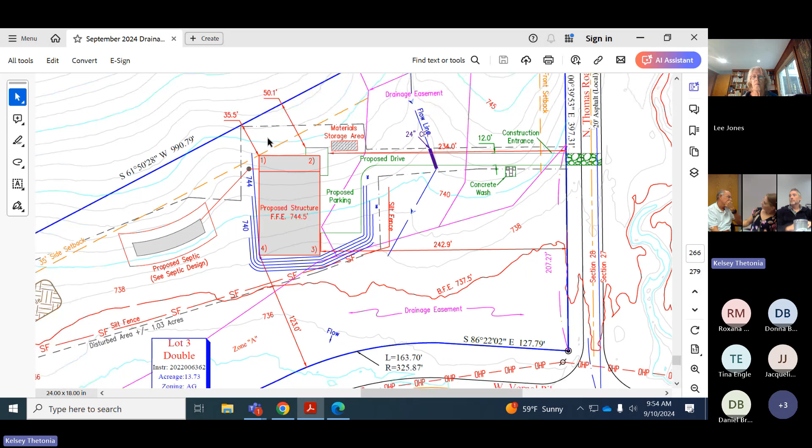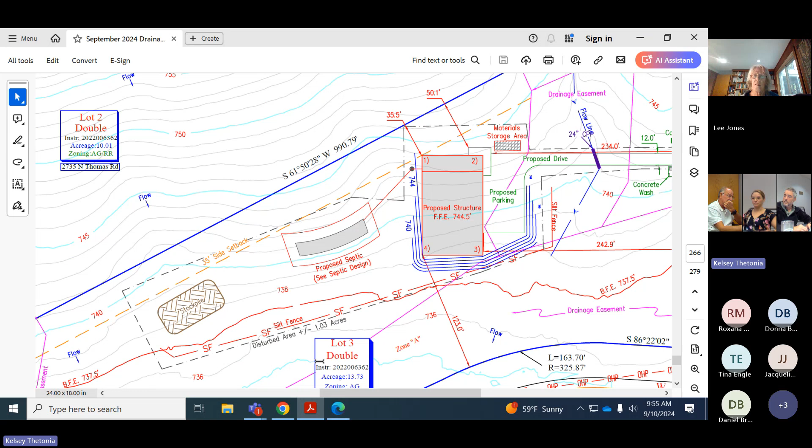From this structure here, the floodplain is right here. So we wouldn't have to worry about drainage components, because the neighbor's backyard has easements for all the drains that go through the old field. It's all drainage easement. There are flooding concerns maybe in general for the stream itself, but not top priority. Vernal Pike floods right there all the time. Yes, it does, and it is all ripped up. They have recently put a very shallow trench along there, but it kind of just fades away, probably a little past where the structure is. And I'm just kind of surprised that we would put this much impervious surface in this area, given that it does flood 3 or 4 times a year.

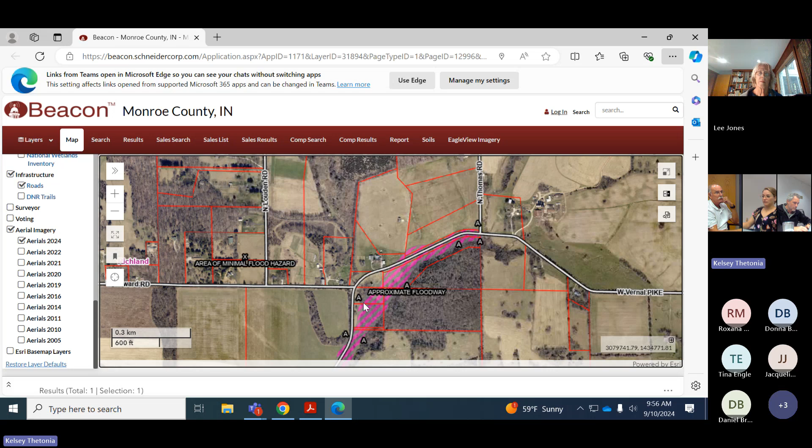I don't know what kind of drainage is along Thomas Road there, but it just all seems to empty out onto Vernal Pike and then run kind of west along Vernal Pike. You're absolutely right. On Vernal Pike, a lot of sections of roadway are in the floodplain. We are gonna pave this section as well. I don't want to speak for highway, but... Yeah, I know. Some drainage maintenance in the area. We did pave Vernal farther south.

But there are sections of roadway that are going to flood unless we raise the road 5 feet. And this section in particular, there's a runaround for people who live in the area to take an alternate route if needed, whereas we have other portions of roads in floodplain where people don't have any way out of their homes if it does flood. So this would rank lower, in my opinion, on priorities for raising a roadway out of the floodplain. From what I can tell, at least, people living here can go up Thomas Road if it is overtopped.

Yes, people who live to the west, like Loudon Road, if people are trying to take Loudon Road, that is a very inadequate road, really rather dangerous. It has no shoulders and the trees come right up to the road. And there's a place where the road is kind of caving in. Oh, we've had some sinkhole issues out there before. If there's one that looks like it's getting worse, please let me know.

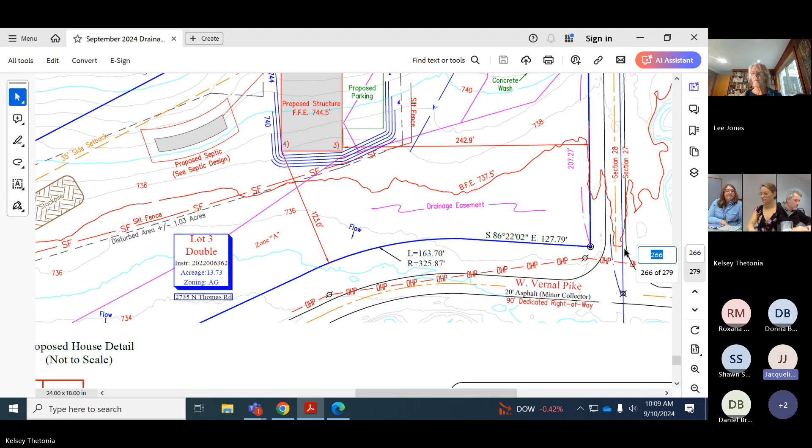We are going to be having impervious cover maximums by zone. And just to give you an idea of what we're thinking, since you're all familiar with the Southern Meadows subdivision, I'll use that as an example. Those lots are about 0.21 acres in lot size.

And what we're proposing is that would allow them to have 60% of the lot size, or 5,500 square feet of impervious cover. That would count driveways, pools, buildings, all of that would count. And then whichever is less. If it's in a critical watershed area, we bump it down to 50% or 4,500 square feet, whichever is less.

So I'm interested in continuing to work with the stormwater team on how to best situate some of these impervious cover maximums, and happy to have that as a separate discussion for another time. But it is something that I can see us needing a little bit of support from other departments and other boards, because I think that a lot of people will maybe not appreciate this maximum because it is new and it's a lot more strict than what we have currently.

So the discussion today of the karst ordinance. Tammy is also online. She's the assistant director, and she's been working with some of the stakeholders that we have, just context that we have. And what we've discussed so far is moving towards having a 50-foot SCA. That seems to be getting some support at the planning commission level, but it could still be part of the discussion that we keep it at 25 feet.

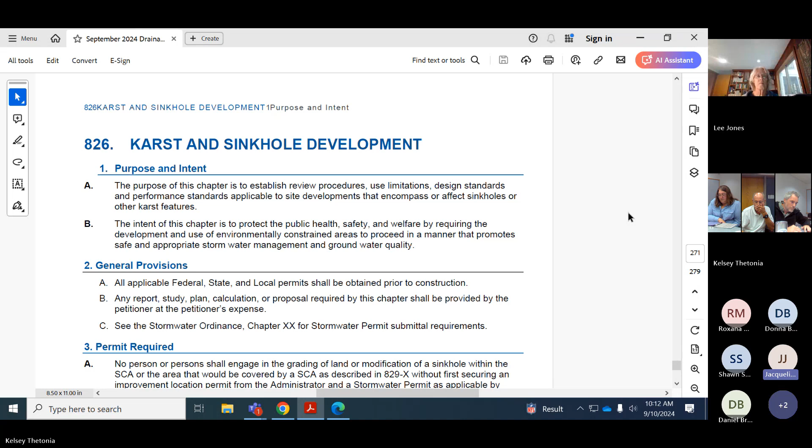And I don't necessarily want to be in a situation where drainage board has given their approval and then BZA denies it, or vice versa. It would just cause a little bit of confusion, I think, for the public. But that being said, right now we have it at 50 feet under the draft, under section 6. It's pretty similar to Kelsey's ordinance, but we've taken out some of the discussions about filling in a sinkhole. That has gone over to stormwater only.

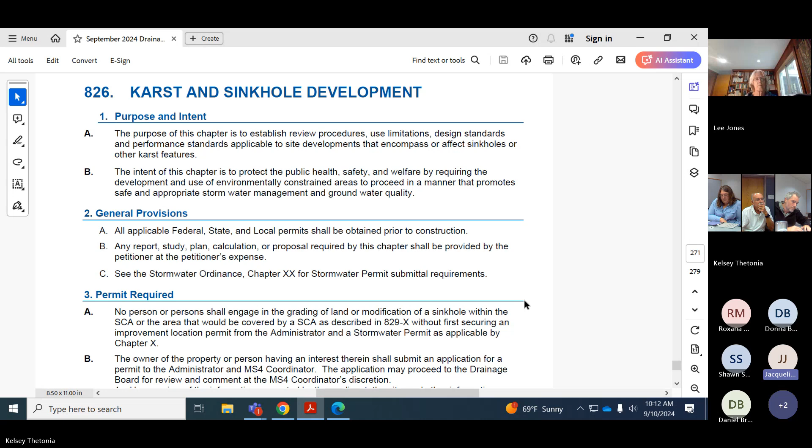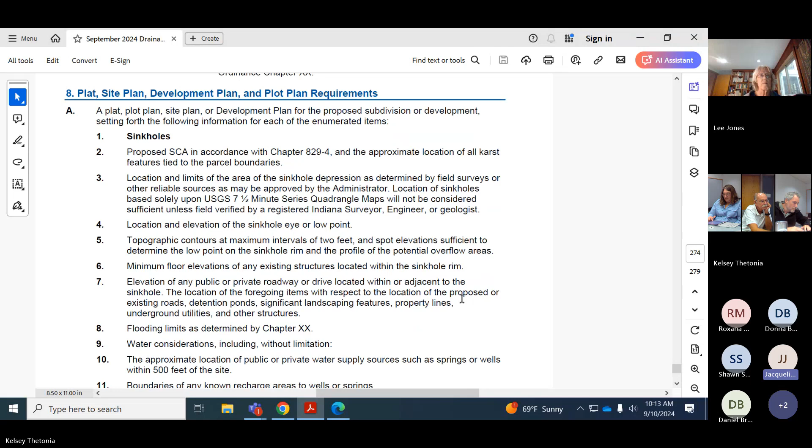So for emergence of new sinkholes, you'll see under section 7, it says all newly emerging sinkholes are subject to the stormwater ordinance. So we're pointing people to go to stormwater instead of having them come to planning. Tammy, did you have anything else you wanted to add about the karst chapter so far? Oh, you know what? Tammy's not on. I'm sorry. Tammy's here, but she just got here.

I'll also say for applicability for this ordinance, it's not only new development and existing development, it's also going to apply to logging sites. So whenever people are wanting to build new logging roads, or sometimes people get a stormwater grading permit, if they're going to be building anything that constitutes a driveway or road through a sinkhole, we would be saying that they are not able to do that. So that's also applicable to this chapter.

Is that the overview? I have a 10 o'clock meeting. Okay, sorry. No, this is important. There's no way I'm going to free my entire schedule up for this particular conversation.

We didn't really vote on the stormwater ordinance. We made recommendations. They did have that 50-foot. I remember having this discussion with the board a couple of different times. We did not drill into it as it came to us for that final draft, which makes sense because they dumped the whole ordinance on us, and we're talking about hundreds and hundreds of pages. And as that proceeded, actually, the Stormwater Management Board didn't get to vote either.

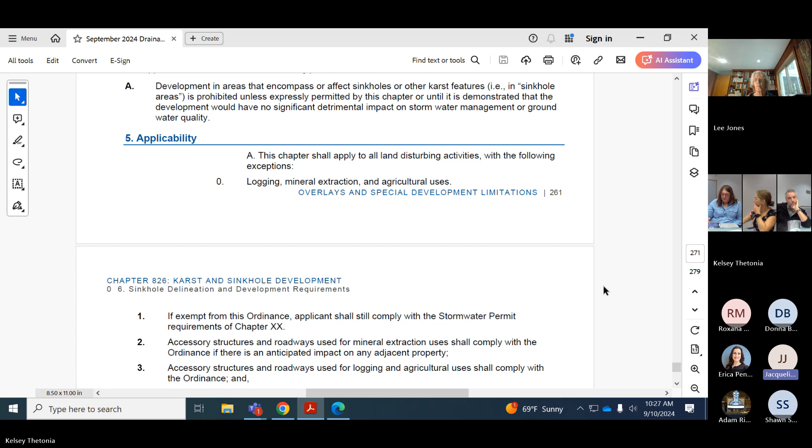If you think you can administer and appropriately evaluate and provide approvals for development in that 50 foot, so they don't have to come to planning as well. And then the other thing related to that, I'd like your viewpoint on section 6 under B, which is the setbacks and use restrictions. We haven't looked at this in a while, but it's always a nice perspective to remind ourselves what it is that we're trying to protect against. What is it that we don't want to see within a sinkhole conservancy area, no matter what width? Is this still appropriate?

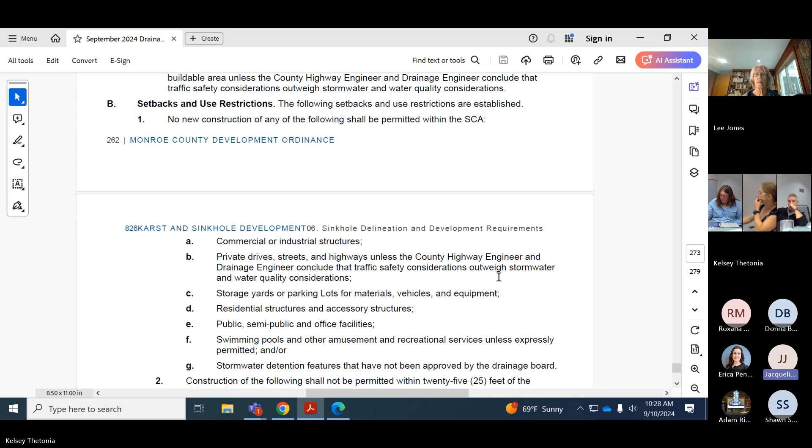So number one, no new construction of the following shall be permitted within the SCA: commercial or industrial structures, private drive streets, highways, storage yards or parking lots for materials, residential structures, accessory structures, public, semi-public and office facilities, swimming pool, stormwater detention features not approved by the drainage board. So are there edits that need to be made to this list? Additions, removals? I know that I'll have to update number 2 below as well, because I think the state allows septic systems to be 25 feet now, and we cannot be more strict than the state.

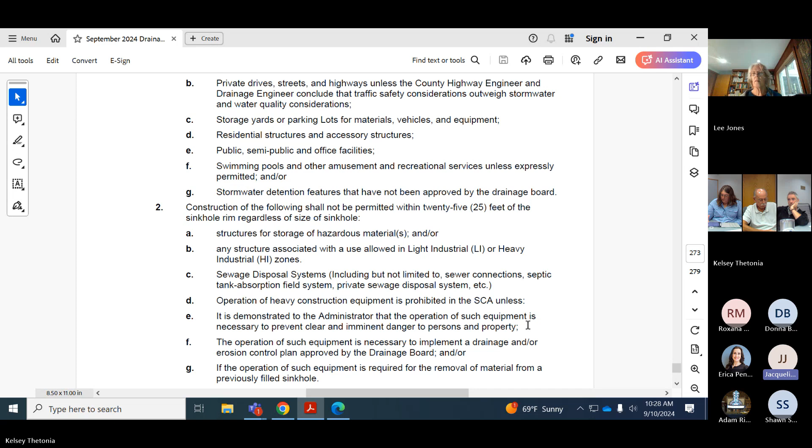But otherwise, are there things missing that you would like to see particularly buffered from the sinkhole conservancy area, or things that, if in your ordinance, we should take out of the planning ordinance and just deal with at the drainage board level? I know I took up a lot of the oxygen in the room, but listening to removing one and streamlining that process and allowing the experts to really make that determination is something I'd lean more towards than having a BZA process every time and looking for a variance.

Because we are a group of geologists, engineers, conservationists, I'm just saying that. The only time the BZA would be involved, if it were only in the stormwater ordinance, is if we have a plat that doesn't meet buildable area requirements or something. I could see that. Right. But otherwise it'd be treated like a drainage easement where it's just drainage board level and planning doesn't get involved with drainage easement waivers.

The other thought I have is that we also have a provision in the stormwater ordinance to either have the 50-foot buffer around the largest closed contour, or we can delineate that sinkhole watershed area. Sorry, I jumped in. I'm just kind of curious how that would work. So I wonder if planning can maintain that 25 feet, because otherwise you would be justifying making it more stringent based on structural or whatever else, but we're looking at land disturbing activity and water quality around the sinkhole. So if they can just have that 25 feet and not change things, they wouldn't have their non-conforming issues.

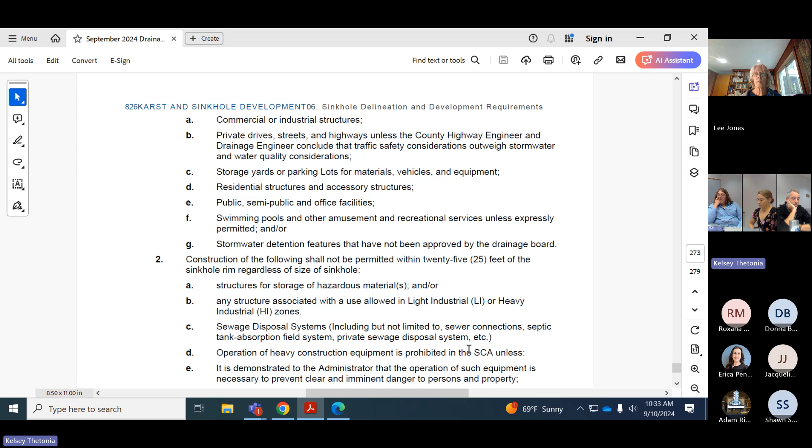And I think the last case is a good example of the potential practical difficulties we might extend on folks, and, well, not saying that that wasn't worth a conversation, but at least those are conversations now. Because I think when it gets into the planning ordinance, it's a whole different vehicle.

Jackie, what's your timeline for this? So we have our public hearing on September 24th. From there, it's going to undergo any edits from comments made by the public. The Plan Commission has to review those and ask our staff to go ahead and incorporate any of those changes they agree on. And then it goes to the commissioners. So we're looking at probably at this point a November, December timeline. Okay.

I really appreciate just summarizing some of the information here about maybe taking out some of the language that's duplicative in the stormwater ordinance, and just having people that maybe are going through a platting process and don't have enough buildable area be assisted with the planning process in addition to stormwater board, but otherwise try not to duplicate every process for people within 25 and 50 feet.

And then it sounds like the research that was done, and Ginger can correct me if I'm wrong, was more so based on stormwater quality benefits from a larger buffer, but not necessarily structural integrity. So for planning to increase it, it may be that we don't have enough research at this time for structural integrity for moving it to 50 feet. And then in 2025, we may have a study done by Jason Crothy. And if that's the case, we don't want to make multiple changes on people, to, I guess, move the carpet from underneath them, if it's ultimately going to be a better end goal.